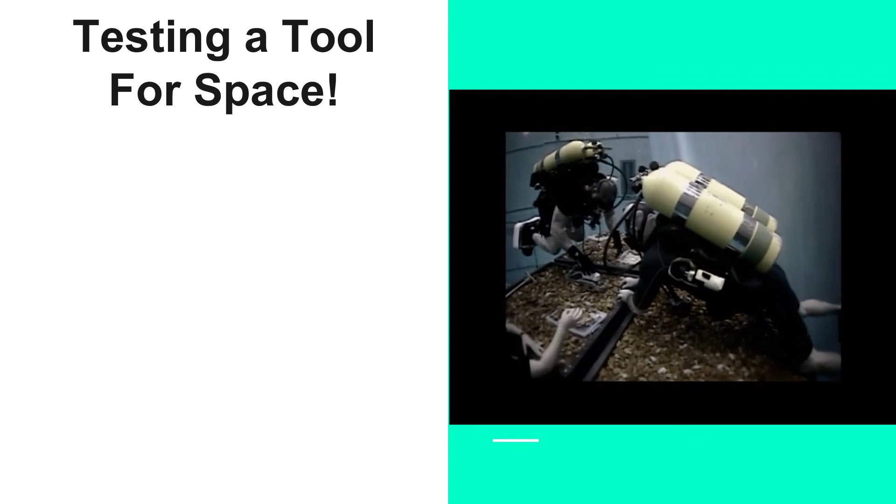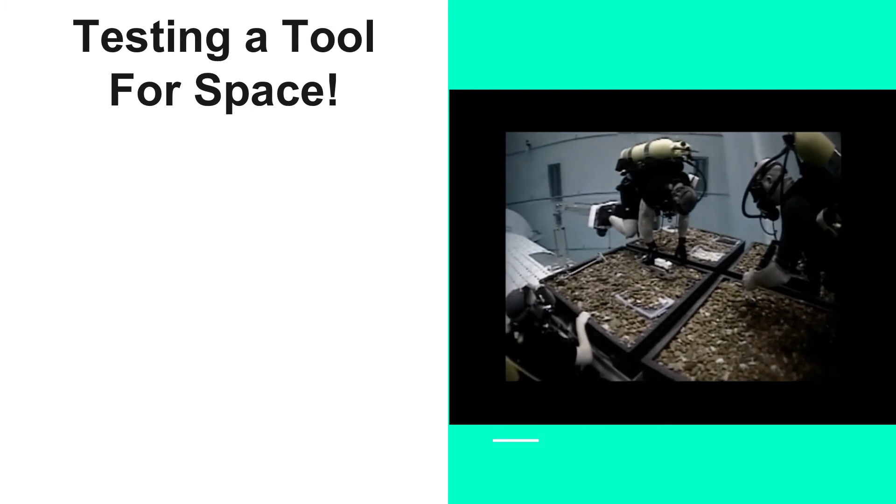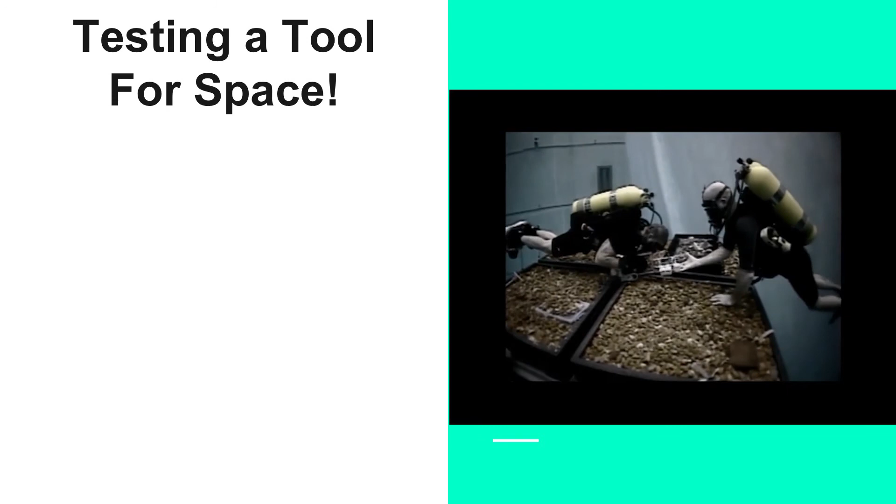TC, diver comm check. This is Diver, read you loud and clear, TC. How do you read me? Read you loud and clear, Diver. Are you moving to the first testing site now? Yes, sir, what would you like to see first? First, could you hold the tool with your right hand by the handle? Sure. Position yourself over a desired sample with the device vertical, pointed down towards the sample.

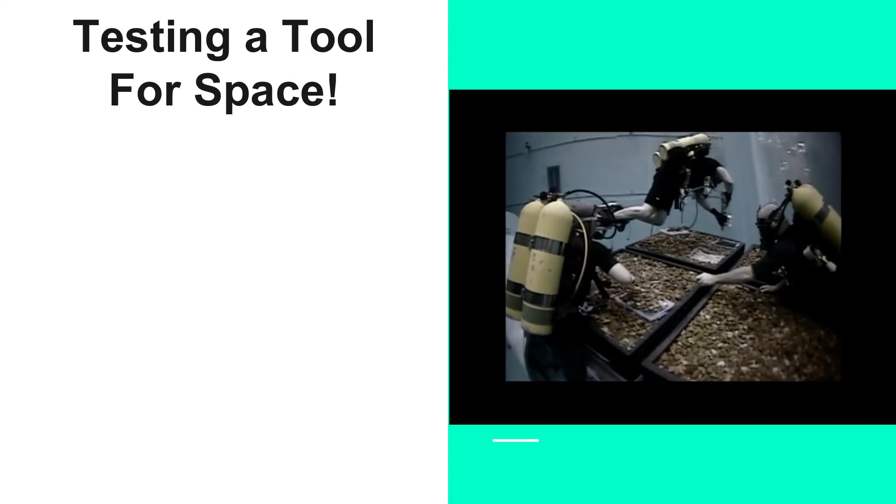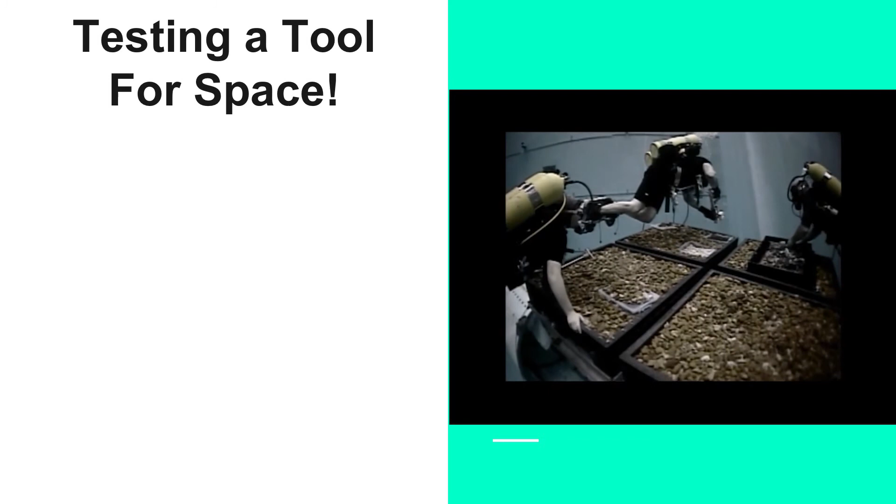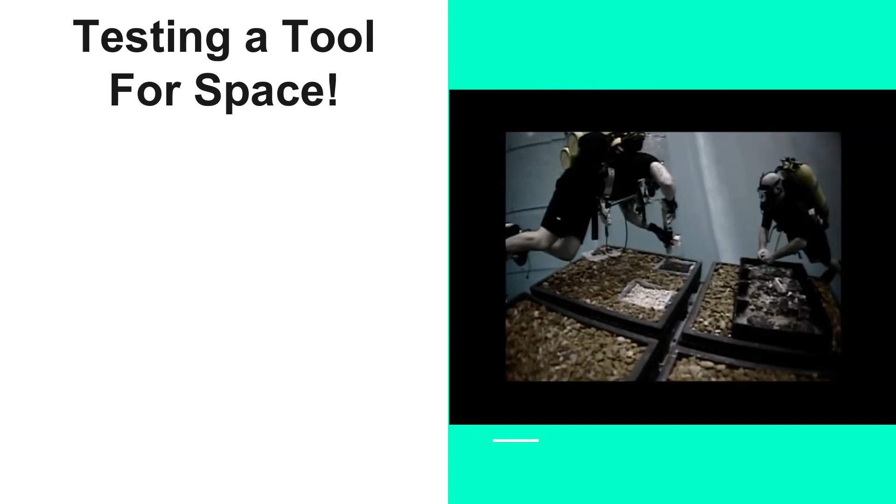Okay. Which sample would you like to see first? First, move to the black box, please. Okay. Now with your left hand, please rotate the first box into the correct position. First box aligned, ready to go. You selected a desired sample. Yes, sir. With your right index finger, depress the safety trigger. Squeeze the actuator to open the sample collection box. Copy that. Now use the sample collection box to scoop up a sample and release the actuator to close it. Copy, scooping. Releasing.

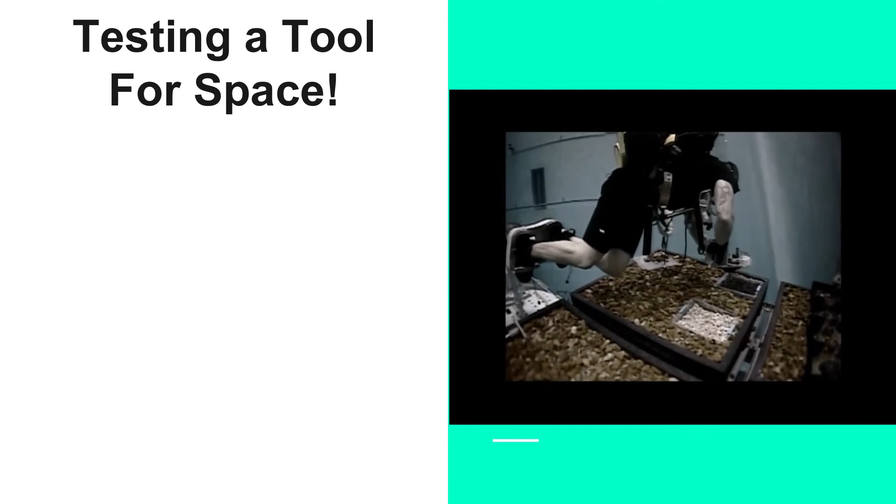Alright, I got some samples hanging out. With your right hand, squeeze the actuator and shake the box slightly to try to seat some of that sample.

So that was really fun. The voice you heard was actually another student. What I really liked about it was, maybe like Apollo 13, I like the procedure, like 'Houston, this is the spacecraft, we got a problem,' that kind of thing. Here we actually got to be part of the procedure. We didn't just stand by and watch them test our tool for us; we were the ones designing the test, talking to the divers in the water. This was at NASA Johnson Space Center in the Neutral Buoyancy Lab. We got to design the tool, take it to NASA, and test it ourselves with the help of the divers. They gave us basically free rein, like we were NASA engineers.

And we were able to do this. This was my second year of school, with a variety of other students from their different years of school. So that was really exciting for me.

I was the team lead for this group, so I not only got to participate in the engineering part of it, I got to use some of my soft skills, like team leadership, making sure our team was in the right place, making sure we had the right documents in place. It really helped me do some organizational work as well. So it wasn't just engineering, it was a lot of other things that I got to practice with, and have a really great team to do that with that had my back, which was really cool.

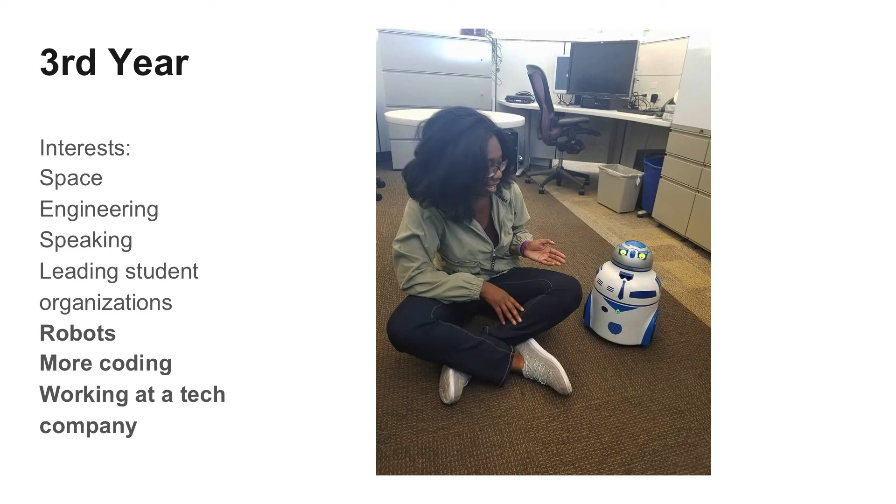So let's go through the third year of school. In the third year, I expanded some of my interests again. This time, I decided that I really did have an interest in robotics, so I wanted to pursue that a little bit further. I expanded my coding knowledge, started learning how to work with Python, worked more with Arduinos and Raspberry Pis, which I see you are working with today. And then also, I made a goal to work at a tech company.

And I got my first internship at HP, which is also nearby in Palo Alto. And it was a really great experience because it was robotics. Now, unlike some of my peers maybe at the time, I had never done anything with robotics before in my life. So I had a bit of an insecurity about working in robotics when everybody else had been in robotics since, say, 5th grade or whatever. At least that's what I thought.

But when I arrived there, I realized that the knowledge that I had, the vision that I had, was unique, and that I could use that unique vision, do a little bit of learning - you know, a big learning curve - but still be able to bring something to the team that was valued, and that the team and my bosses really liked and kept me on for.

So I got to do robotics at HP, which was my dream. And it was a really great experience because the CTO of HP, Shane Wall, came and saw my robotics hand project. So I'm going to show you the project that I put together within 3 months during the summer. Over here, Shane Wall, the CTO of HP, took this video of my robotic hand.

What the hand does is it actually takes in information from a camera. You could see the other hand in the background on the computer. And from the camera, it decides how far it should move. So basically, it's a robotic hand that's controlled visually with computer vision and 3D vision.

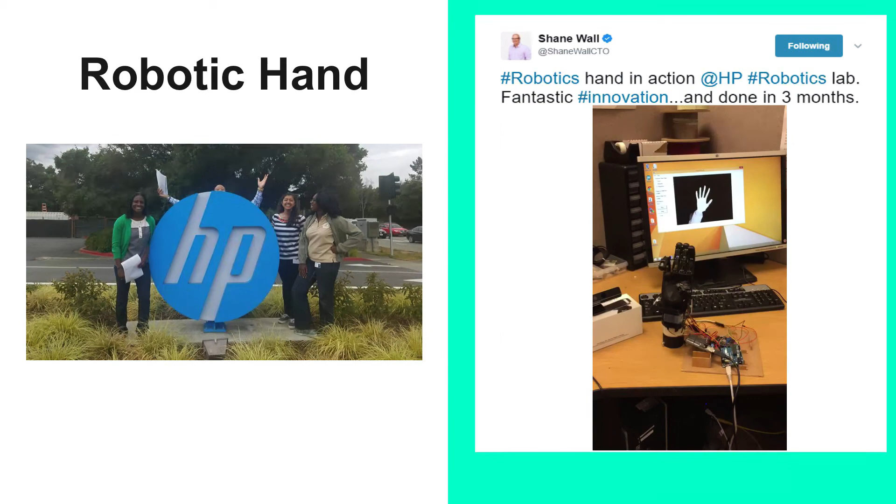Okay, so my 4th year, I was like, this is really great, I've done all these cool things. I think what I really want to do is do some more traveling, maybe document some of my experiences, and see where that gets me. I also started learning more - besides just robotics, I started learning about artificial intelligence and machine learning in another internship with HP. And then I also wanted to try to understand some of the issues that were going on at my school, outside of engineering, outside of my college, but also with the environment at school and diversity and inclusion. So I also started taking on those things.

So have a story, be ready to tell your story, and then you can see what happens next. That was my goal for my 4th year: to travel, to do more speaking, to blog, and let people know what I had done.

I also got to go to MIT to visit another school, which is really cool because MIT is the really awesome school that everybody wants to go to. I got to go visit and see what graduate school might be like.

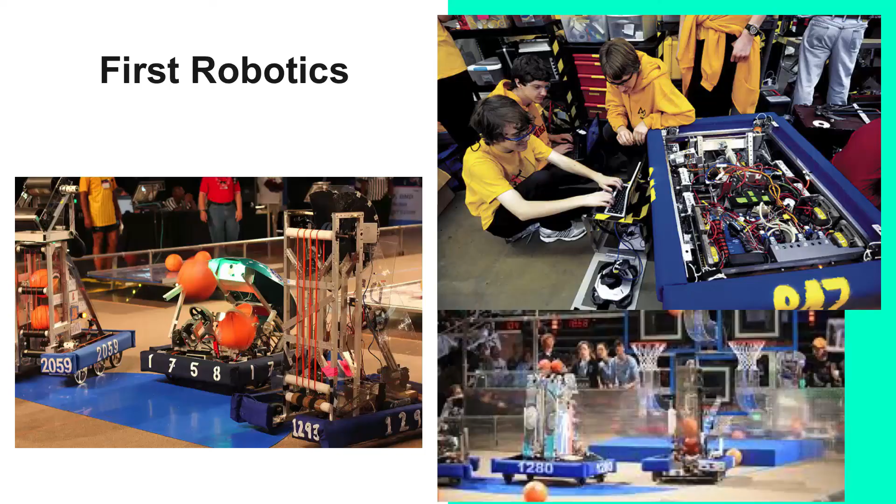So I'm going to have Parker come up and talk a little bit about FIRST Robotics. Thank you.

Hi everyone, my name's Parker. I work with Camille at X. We build robots, and it is really awesome.

Camille has a fantastic story, and mine's a bit different in that I've been doing robots for quite a while. FIRST Robotics is a school-oriented robotics competition organization. They have competitions starting with FIRST LEGO League Junior in elementary school and even kindergarten, and then run through a bunch of different programs up through high school with the FIRST Robotics Competition. I know I saw a few hands for people currently on a FIRST team. I don't know if you'd be on an FLL team or an FTC team in middle school or high school—there's a bunch of different programs that work through the different levels of school.

I can really give credit to where I work now at X, this super awesome environment with super awesome people, to being a part of FIRST. Most notably in high school, I helped start a FIRST Robotics team at my school—they did not have one. I then captained that team for 2 years, and I've come back to mentor that team. Through all of this, being wrapped up with this program for almost 7 or 8 years, I also blog with FIRST about outreach and getting kids involved, and I also, as of now, speak about FIRST too.